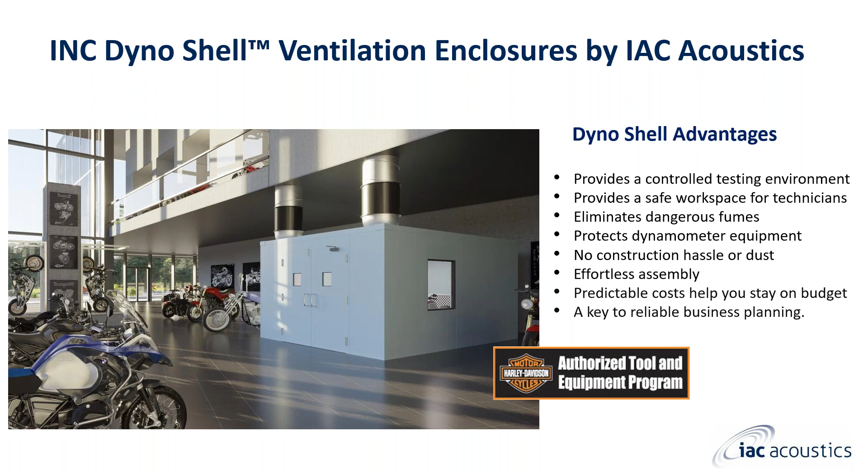So, years of tuning have made our precision engineered IAC dyno shell rooms less expensive and substantially higher performing than do-it-yourself rooms using conventional building materials. This is what we do.

On the left side of your screen, you can see the IAC Dyno Shell ventilation system. It is designed with two powerful exhaust stacks. Fumes and combustion are filtered out of the room, while the inlet provides fresh air for the technician. The design also has an integrated single-leaf door and one-pane window.

He struggled to breathe due to the fumes and realized he would quickly lose his hearing if he continued using it. He had to stop business while he researched solutions and became increasingly behind in services. Additionally, he lost all the money invested and wasn't ready for the racing season.

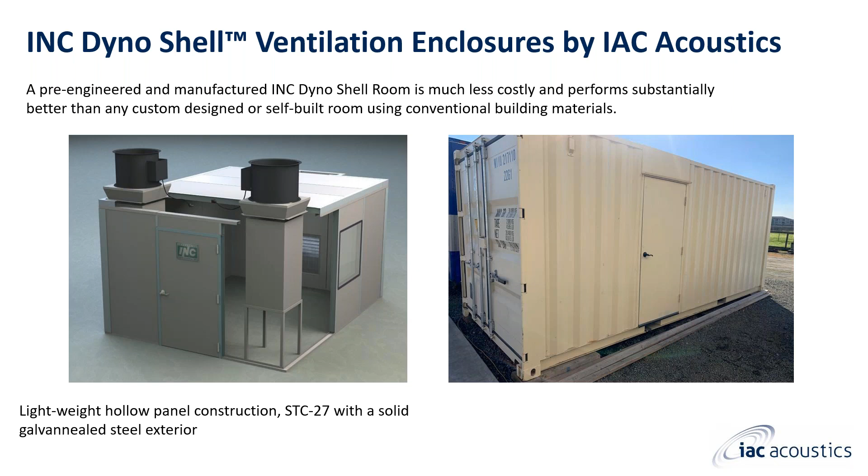Our IAC Dyno shell ventilation system has standard and custom designs to fit your requirements. Our standard rooms come in the following sizes and features.

Standard shells are 12 feet wide and come in lengths of 10, 15, and 18 feet. Standard designs offer one 30-inch by 42-inch window on any wall, one single-leaf STC33 door, 4 feet wide and 7 feet high. Available upgrade is one double-leaf STC33 door, 6 feet wide by 7 feet high.

Below you can see the drawings of our typical designs.

When designing and purchasing a Dyno shell ventilation enclosure, clients should consider that the internal dimensions are considerably smaller than the external dimensions. You need to ensure that your host building can accommodate the Dyno shell ventilation enclosure.

Clients should plan to add 3 feet on the back of the enclosure to allow for the inlet plenum. Allow also 3 to 4 feet above the roof to ensure there is enough space for the roof-mounted ventilation system.

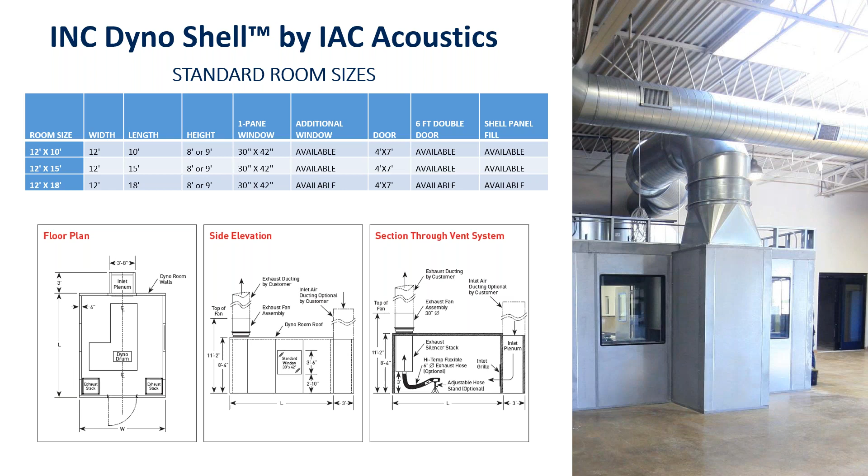Our Dyno shell ventilation system comes with these popular options. As shown on the bottom of your screen, the wide Dyno shell has a powerful Super Vent Silence ventilation system consisting of 2 exhaust stacks that are mounted on the roof.

Double leaf swing door, 6 feet wide by 7 feet. Viewing windows 30 by 42, and also larger viewing windows that are 60 inches high.

Here we can see that the Dyno facility customers are enjoying testing the performance of their motorcycles rather than gasping for air. Our doors are STC33 APR doors.

They come with options such as closers, top and bottom surface bolts, and integrated 12-inch by 12-inch windows in the leaf.

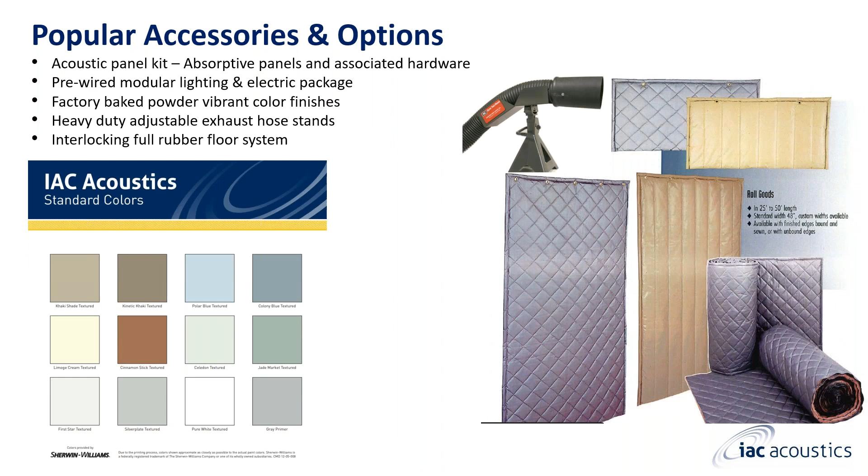Most popular options that we offer are the absorptive panels that will provide you with NRC up to 1.05. This kit comes with all of the installation hardware. The kit can be very easily installed temporarily or permanently.

We also offer the pre-wired lighting and electrical package that are available upon request, or otherwise please use your local electrician. Powder coating is available in the color options below. The powder coating will prevent your panels from rusting and will give a finished look to your Dyno shell enclosure.

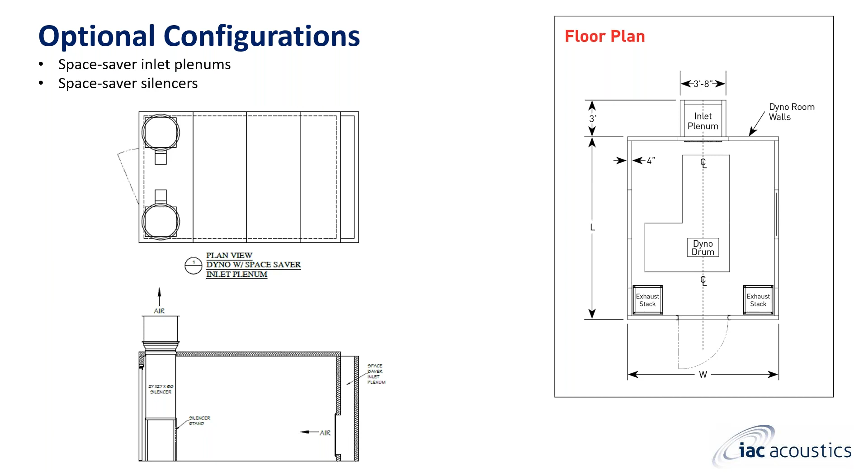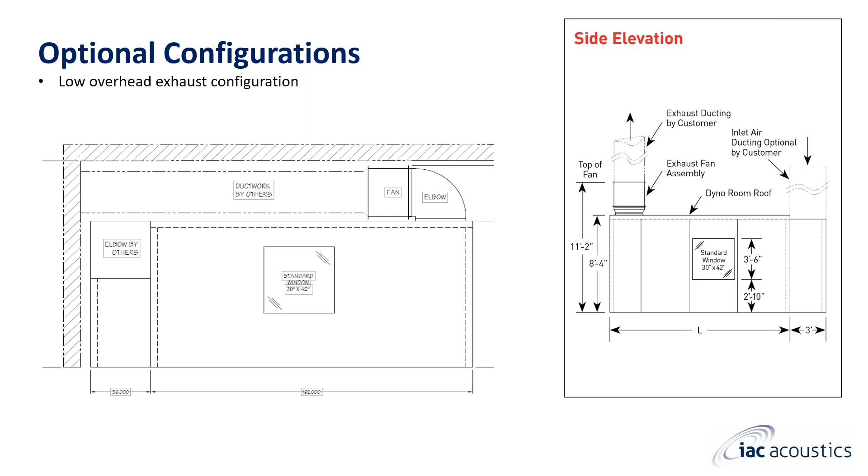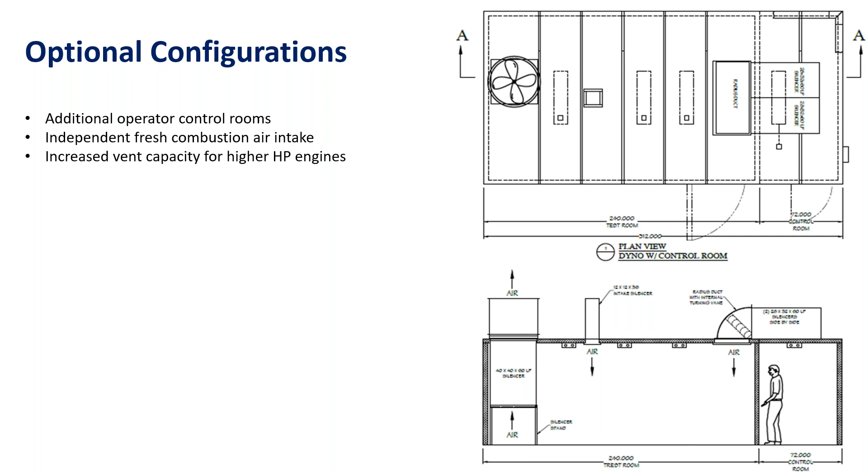We can also offer an independent combustion air intake. The top drawing illustrates a square penetration to show the additional air intake. The bottom drawing shows the intake silencer mounted on the roof of the enclosure.

A Dyno shell room is only as effective as its ventilation system. Our system provides the removal of heat, carbon monoxide, and other toxic gases, while providing fresh air for the operator's comfort. This ventilation doesn't sacrifice any noise reduction.

Our ventilation systems are pre-engineered for each application. The Silence ventilation system is designed specifically to provide high-performance ventilation that is necessary for technicians and dynamometer testing equipment. Air changes inside the dyno room are approximately 8 to 10 times per minute.

The Silence ventilation system works by pushing engine exhaust gases and heat out of the room through our unique Power Flow silenced exhaust stacks. Fresh air at the same time is pulled into the room through our aerodynamically designed inlet plenum. The system is self-balancing and sized to operate under negative static pressure to prevent exhaust gas leakage.

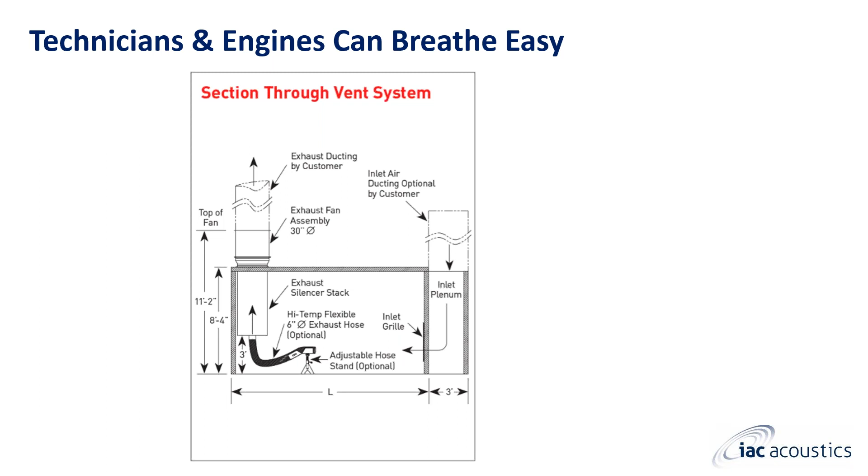IAC Dyno shell rooms are shipped in modular kits. They can be assembled on site by you or a local contractor. Kits are specifically designed to be installed easily with no previous experience. Each room is shipped with detailed instructions and drawings. Assembly is simple and can be done with a 2 to 3-person crew using standard hand tools. Assembly takes approximately 2 to 3 days, and technical help is always available when needed.

If an installation is too time-consuming, IAC installation services are available upon request. Our kits have the following components: modular wall and roof panels, base channels, joiners, trims, and flashings, caulking and assembly hardware, doors with frames, window panels, and detailed assembly drawing instructions.

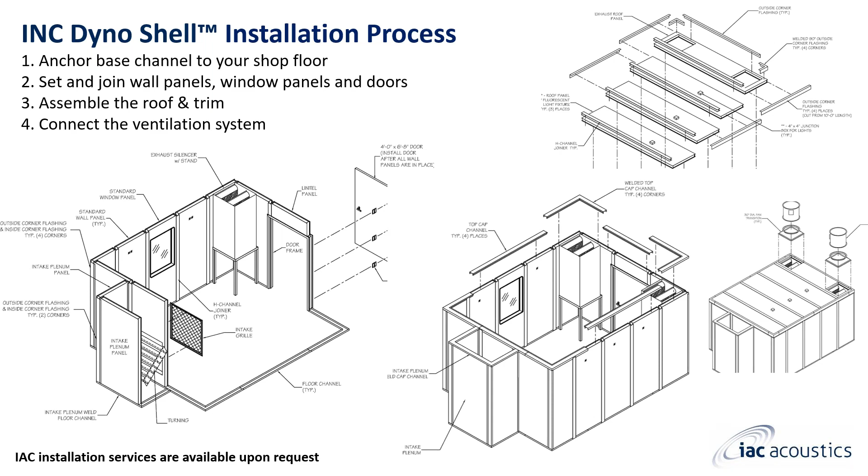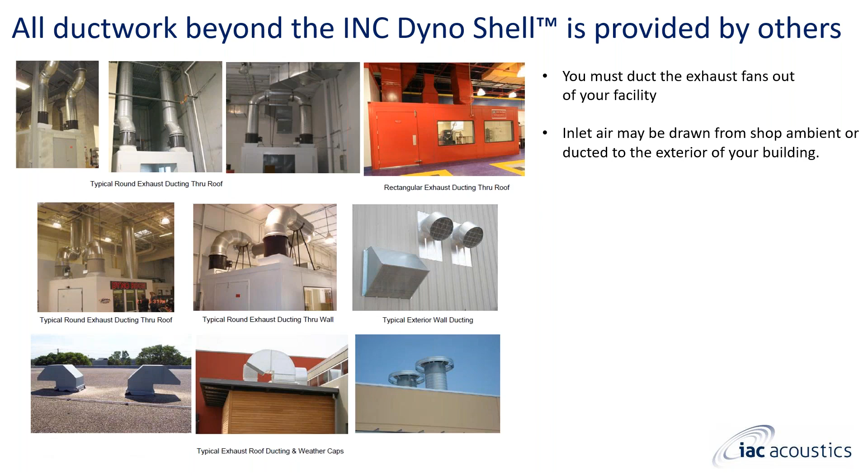You must ensure that you use exterior wall ducting and weather caps to prevent birds and weather elements from going into the system. We recommend the ducting to be no longer than 15 feet, and any turns must be made using turning vanes to minimize duct pressure and not to compromise the ventilation system.

The Dyno shell standard design provides STC-27 and a super vent ventilation system. Any design can be upgraded for higher acoustic performance up to NIC of 70. Our standard Dyno room enclosure is constructed with STC-44 panels and STC-51 doors. STC-44 is nearly 4 times better than STC-27.

In conclusion, while it is true that owning an IAC Dyno shell room will, along with saving your time and money, protect your equipment and the health and safety of your valued employees, our system will ultimately help your company have the right tools to make your engines rise above the competition.

Now I would like to play for you our rendering video. So I'm going to share very quickly the video so you can have an image of what the Dyno shell enclosure ventilation system looks like. Just 1 second.